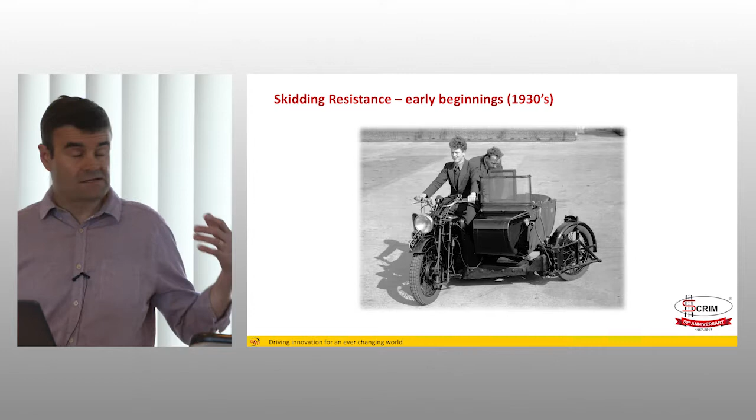Measurement of skid resistance is not new technology in this country. This was developed in the 1930s when a lot of research was done, by the predecessor to the TRRL, and this concept of a sideways force measurement system was developed.

Initially it was on a motorcycle, with a full compliant risk assessment for those people involved. The first SCRIM, as we would recognise it, was produced in 1967, so just over 50 years old.

SCRIM is an acronym that stands for Sideways Force Coefficient Routine Investigation Machine, surprisingly shortened to SCRIM, but it kind of says what it does. So we're measuring a sideways force, and that force is used to characterize the skidding resistance of a road surface.

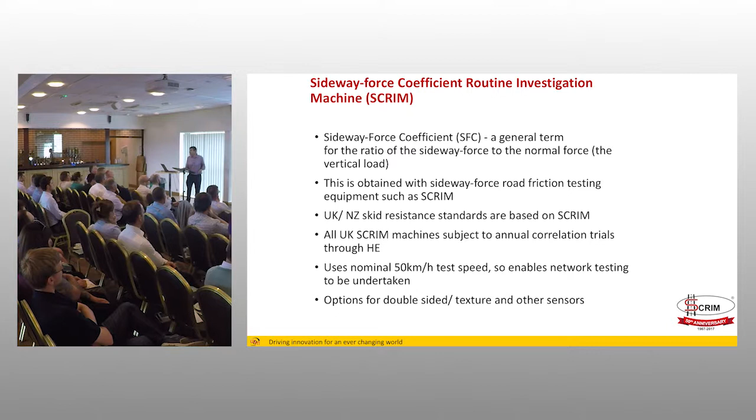All of the vehicles that use the sideways force technique in this country go through an annual accreditation process at TRL. So your supplier, which may well be WDM, should be able to provide you an accreditation certificate for the vehicle that's using it. The UK standard HD28 and the New Zealand standard, which goes by the snappy title of T10, are all based on SCRIM.

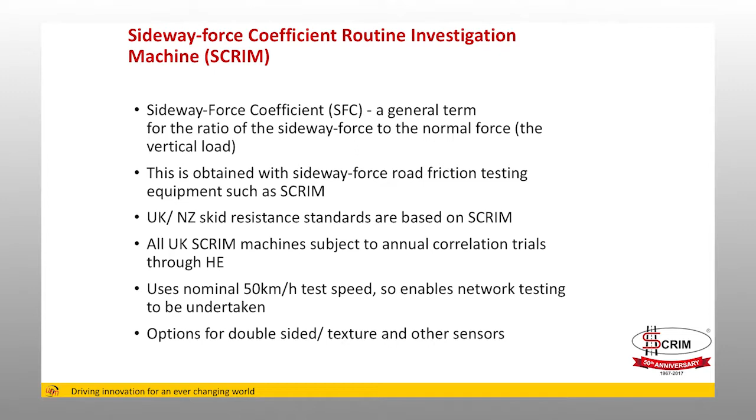Talked about correlation. The nominal test speed is 50 kilometers per hour, with a speed correction between 25 and 85. So it's a device that's designed for network testing, but can also be used for more detailed investigation. We would typically expect between 100 to 200 kilometers survey a day.

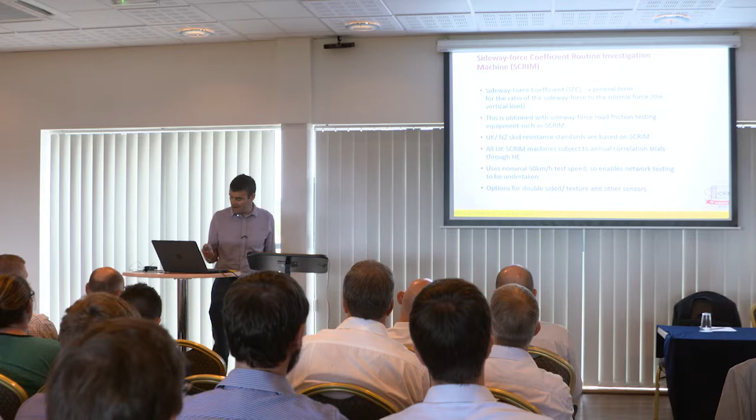There are lots of options about it. You can have a single-sided SCRIM, you can have a double-sided SCRIM, you can put texture sensors and other sensors on them. The only constraint typically is that SCRIM as a measurement process uses water, and mixing water with other sensors, particularly lasers, is not necessarily a happy mix.

So the measurement there is the test wheel. The test wheel has no tread. It's a standard resilience tyre held at a particular pressure, so it's the scientific principle of taking out the influence of other things that may be influencing your measurement.

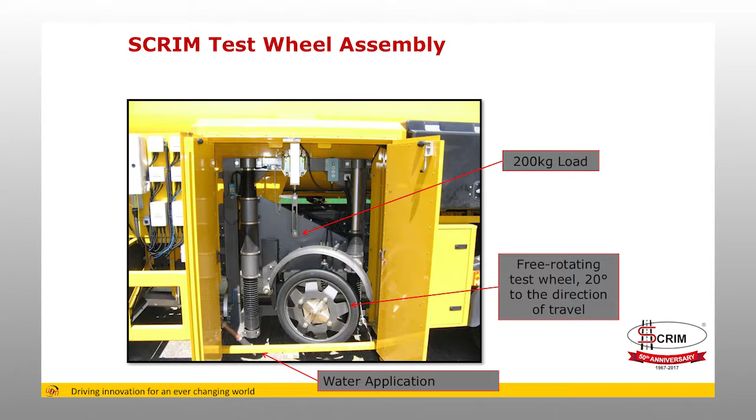It's set at 20 degrees to the direction of travel. So that's rotating, but effectively it's always trying to straighten itself, and it's that force of it trying to straighten itself, which is the force that the road is exerting on the tyre, that is what we measure.

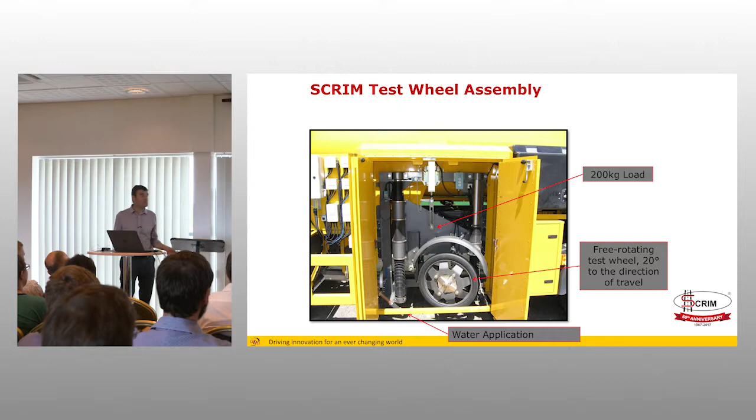Fixed load, 200 kilograms. The modern SCRIMs use a load cell, so it's a dynamic load measurement system where we're measuring the load. I think that's a 32 kilohertz system, so we're measuring that load and the sideways force continuously. Water is applied in front.

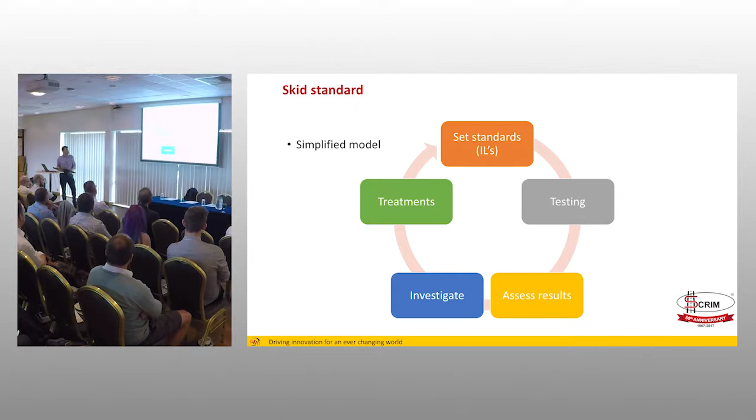We've probably already dealt with the sort of simplified skidding model. So you set standards, you carry out testing, you assess the results, you investigate the results against your standards, and then you decide to either treat or not treat. In theory, you go around in a cycle and maybe revise your standards if you find that you're investigating a lot of sites but don't feel there's a need to treat, or equally, the reverse is true.

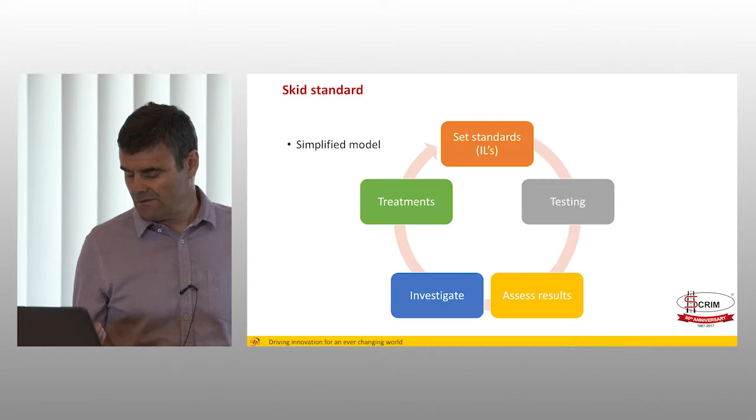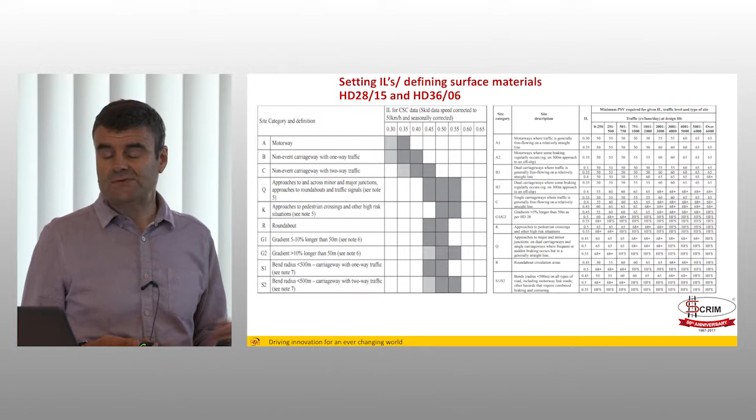In terms of treatments, most of you will be familiar with that. Two snapshots from HD28 and HD36. HD28 is the skid standard which sets the investigatory levels, and HD36 is a selection of materials guide, and that essentially puts a recommended PSV against a site category, an investigatory level, and a traffic level.

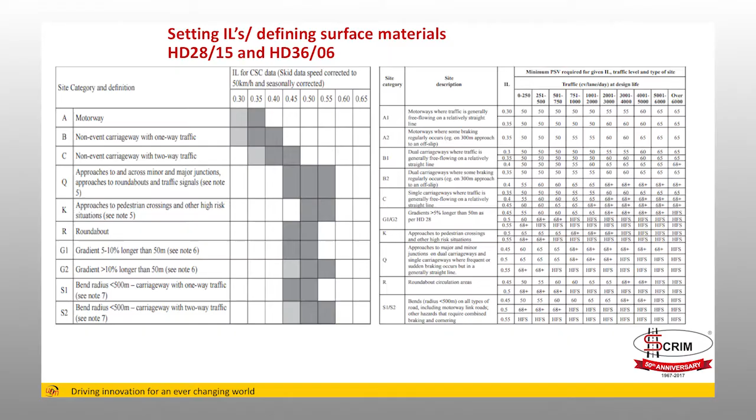There are local variations on that. Some authorities work to their own investigatory level tables or their own PSV table. But in essence, what HD36, when you drill down to it, says is once you get to an investigatory level of 0.5, you're typically getting into the area where you are looking at high friction surfacing as the material that will give you a high confidence of that skid resistance being delivered.

So typically that can be approaches to junctions, it's certainly approaches to crossings, and it can be tight radius bends.

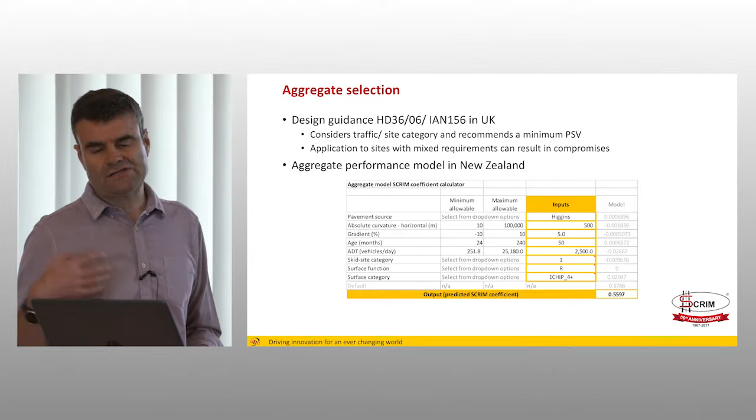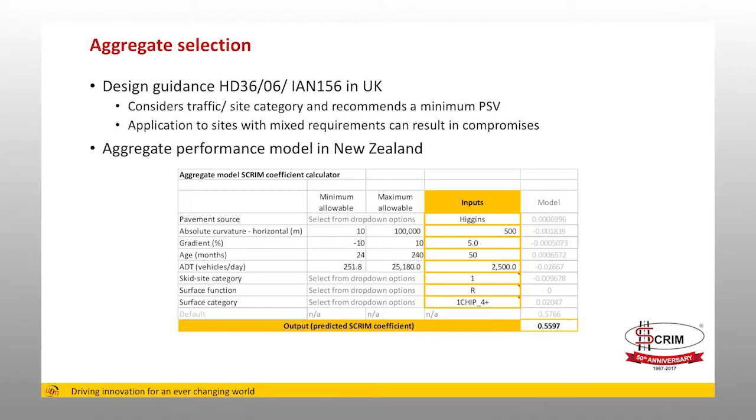In New Zealand, they apply a slightly different approach, which is an aggregate performance model. There's a statistical review of different aggregate sources. One thing HD36 doesn't explicitly say, and this does, is it asks for an estimated life - what life do you want that surface to last for? With an aggregate selection and characteristics of the site, it will give you a predicted SCRIM at that period of time.

Whether it's a more successful approach is a point of debate. They apply a very similar set of investigatory levels, but they also have an intervention level as well, and they tend to work very much to the intervention level for those purposes.

In terms of the highest investigatory levels, which are 0.5, 0.55, and even 0.6 in some circumstances, the recommendation in HD36 is 68 plus PSV as a minimum requirement. In many cases, HFS, high friction surfacing, is explicitly recommended.

HD36 is leading you to potentially using these materials, but in all cases you might have a process of departure or relaxation, which is that design process that actually evaluates individual sites and comes up with a suitable solution. If you have a departure and relaxation process, you need to have a record of that and how it's applied.

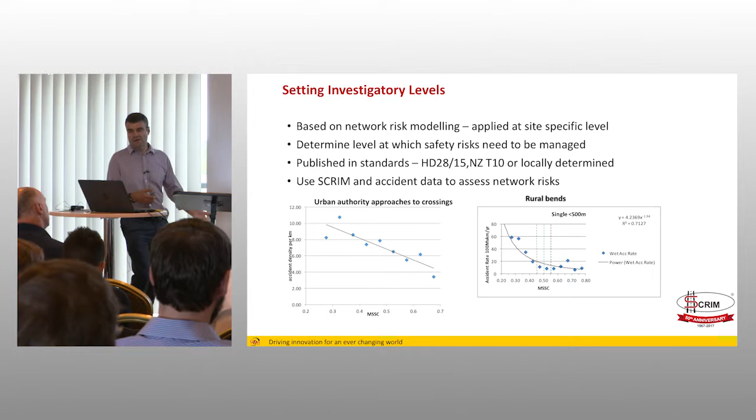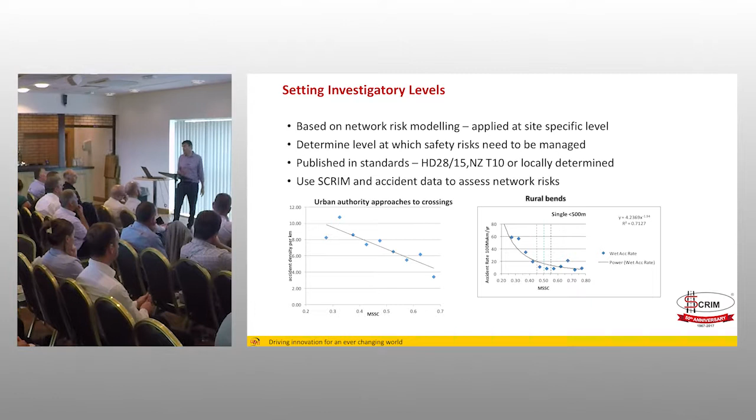The urban authority approach to crossings is a fairly linear relationship, and the rural bends is a slightly more power relationship. So the premise of setting investigatory levels is a balance between affordability and what I'll call an acceptable accident rate, rather than a desirable one. We've done this research for a number of authorities, and we almost without fail come to very similar shapes of graphs.

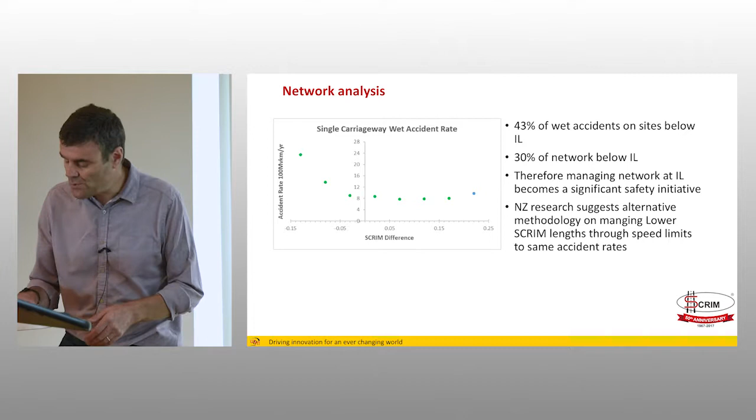So this is a network analysis. This is the SCRIM difference - the measured skid resistance minus the investigatory level. So anything that's positive means the measured SCRIM resistance is above investigatory level. Anything that's negative means the skid resistance is below investigatory level.

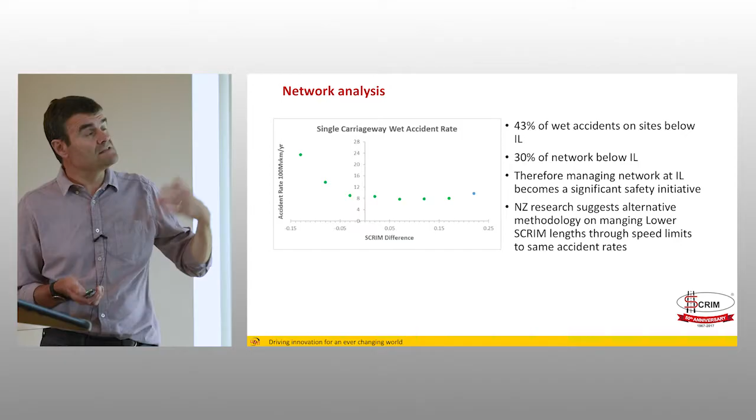This is single carriageway sites. 43% of the wet accidents are on sites below investigatory level, and 30% of the network is actually below that. The graph tells you that once you get much below 0.05 below investigatory level, the accident rate is starting to increase. So managing the network at and around investigatory level is a significant safety initiative.

You'll have colleagues in road safety who will look at accidents and investigate causations, trying to understand the circumstances. Yet in the background there may be a level of risk to your network just because parts of it are below investigatory level. Balancing those two approaches is something that I think a number of highway authorities do struggle with.

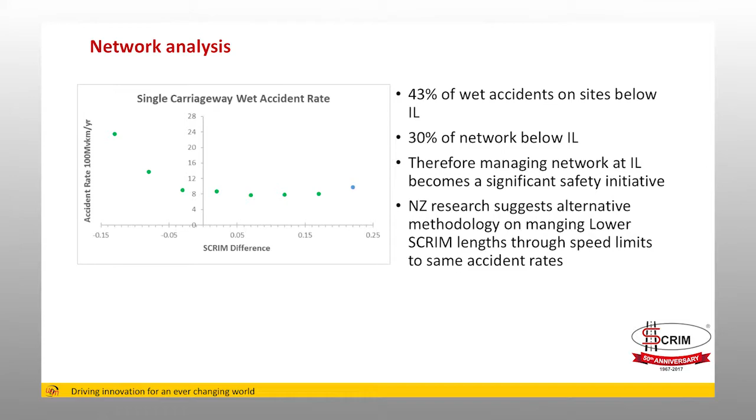New Zealand do a lot of research - everything they do is evidence-based, and they're also very good at sharing their research, which helps in increasing understanding. They've done a recent piece of research about managing accident rates on skid-resistant deficient sites by changing speed limits, doing cost-benefit analysis taking in travel time, user costs, etc. Their research is largely suggesting that a 10 kilometre per hour reduction in speed is the equivalent of something like a...

...0.05 change in skid resistance, predicated on the fact that you need to have a realistic enforcement policy for speeding and an acceptance that people will actually adhere to the limits. It still leaves this residual question about the 85th percentile - what about the 15% of people who will still speed? But it's a piece of work that they're developing at the moment.

This is actually from Transport Scotland. So we've looked at accident rates and the severity split by site category. And what it essentially shows is bends on single carriageways, approaches to crossings and single non-events tend to have a higher proportion of fatal and serious accidents.

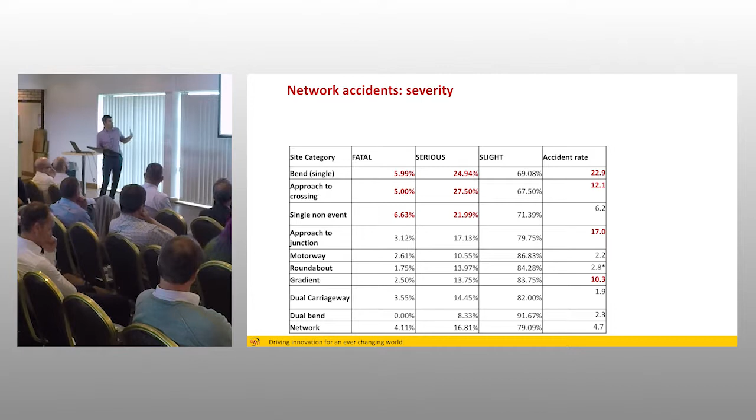The bend is probably self-explanatory in terms of losing control, leaving the carriageway. The approach to crossing is probably because there's a high probability you're going to hit a vulnerable user. And the single non-event might be a mix of factors in there. But essentially, it's showing that the accident rates and the severities are linked to that.

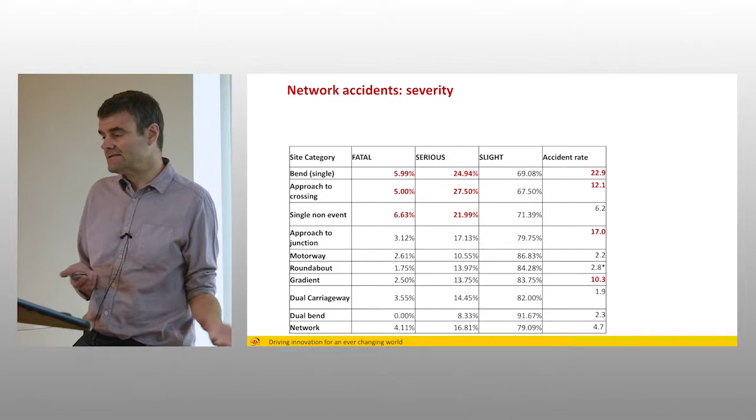And of course, where are we asking for the highest investigatory levels typically? It's on single carriageway bends and approaches to crossings. And the accident rates are also higher for the first two of those sites and approaches to junctions.

So, a snapshot of an aggregate performance review. Again, this is Transport Scotland. To do this, you need good construction records. If you've not got good construction records, you can't do this. And good construction records means you know the location, the time it was laid, the material, the aggregate source, and so on and so forth.

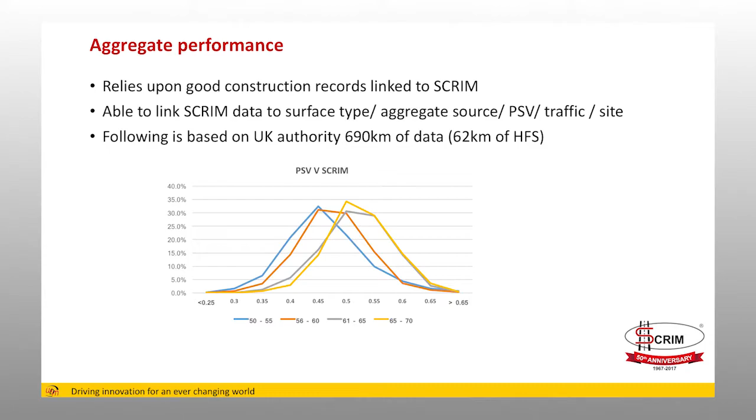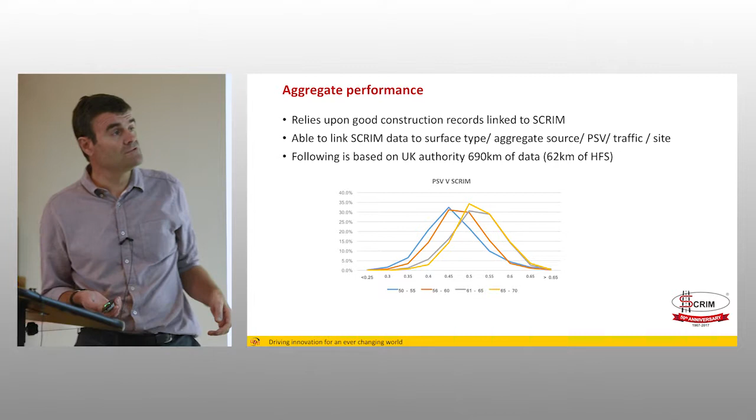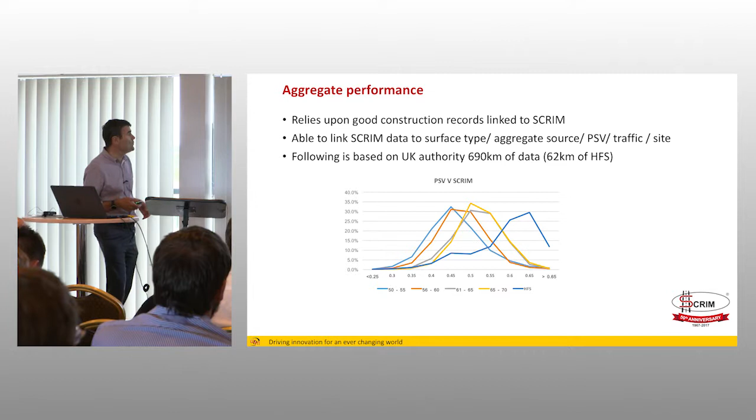But this is PSVs against distribution of PSVs against SCRIM. And fortunately, as you go up the PSV, there is a slow march to higher skid resistance, which is what you want to show. If we then put the high friction surfacing on top of that, you can see there's a significant step sideways by almost 0.1 skid resistance level. So 0.1 becomes a very significant increase that you can achieve from that.

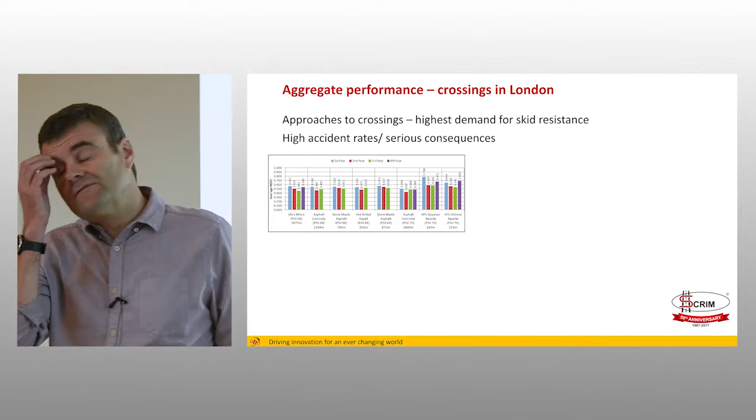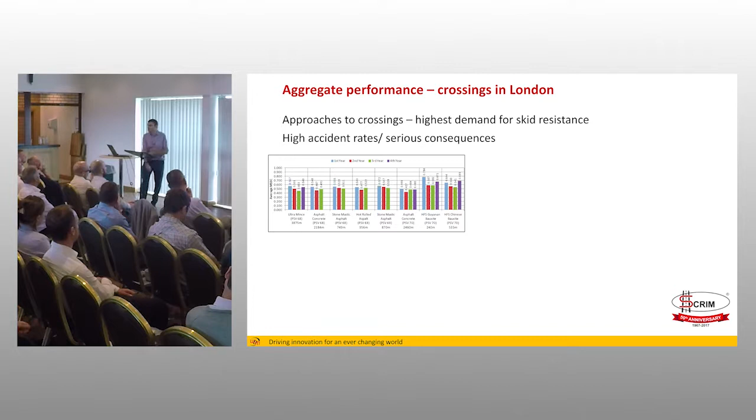We were, a few years ago, commissioned by the 33 London boroughs and Transport for London, which is an interesting environment to work in with 34 highway authorities in London. And they were very concerned about what they saw as the financial consequence of their approach to crossings and having a demand for skid resistance on them.

When we've reviewed sites and prioritised sites for London, about 60% of the sites that are high priority tend to be on approaches to crossings. And they said, we've got some information about other material types that have been laid, and we'd like you to tell us, look at the skid resistance to see what the data shows.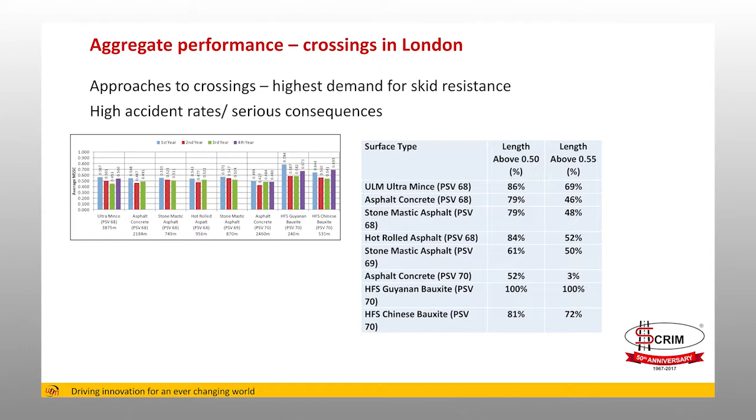And I appreciate that's fairly difficult to see, but you've got a ULM with a 68 PSV, a 68 PSV asphalt concrete, a stone mastic asphalt. And essentially, we looked at the skid resistance over years, but that chart is summarised in there.

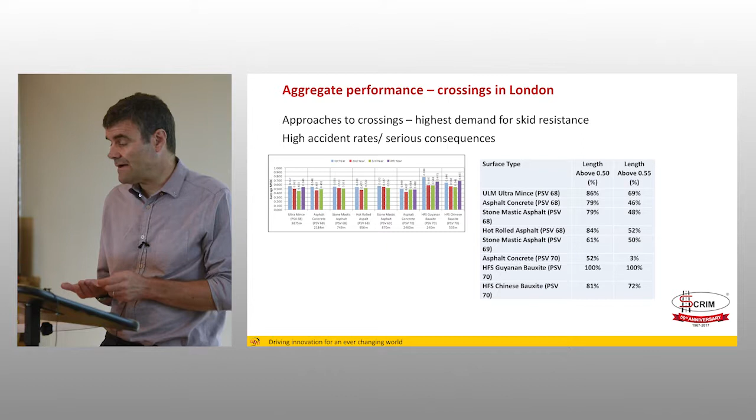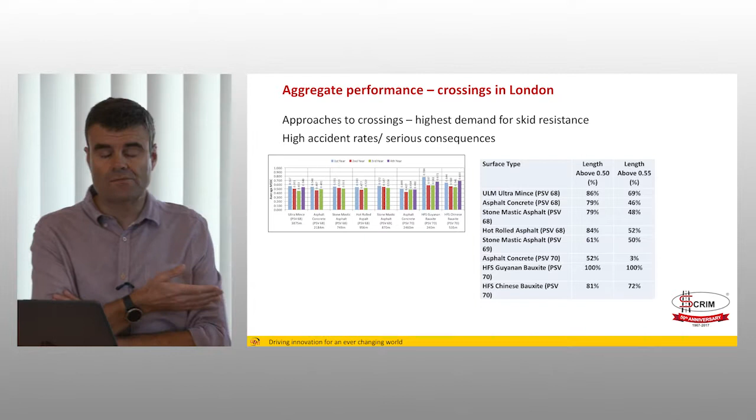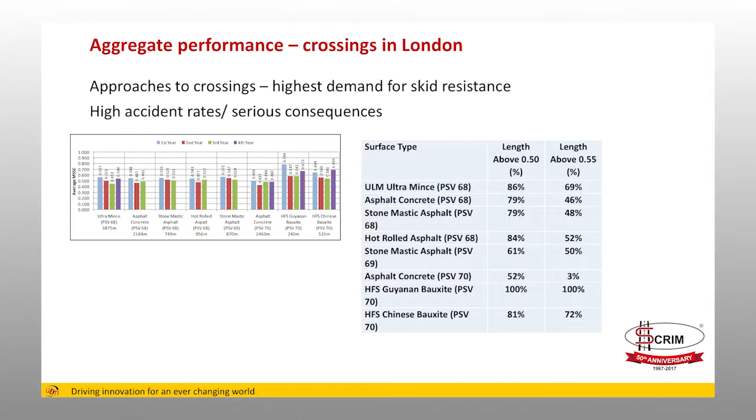Essentially, the high PSV aggregates, naturally occurring aggregates, would give you about an 80% probability of being above 0.5 IL. In London, they do use 0.55 because of the vulnerability of pedestrians and the number of pedestrians on crossings in the city. So for the 0.55, essentially what that data was showing is the only material that's going to give you a high confidence of meeting 0.55 in particular was the high friction surfacing.

That wasn't necessarily the result that the London boroughs wanted, so we did some additional work to look at evidence. Analysis we did many years ago showed a good correlation between accident rates and skid resistance of crossings. And going back over 30 years ago now, Arthur Young published his PhD, which basically showed benefits could be achieved through the application of high friction surfacing.

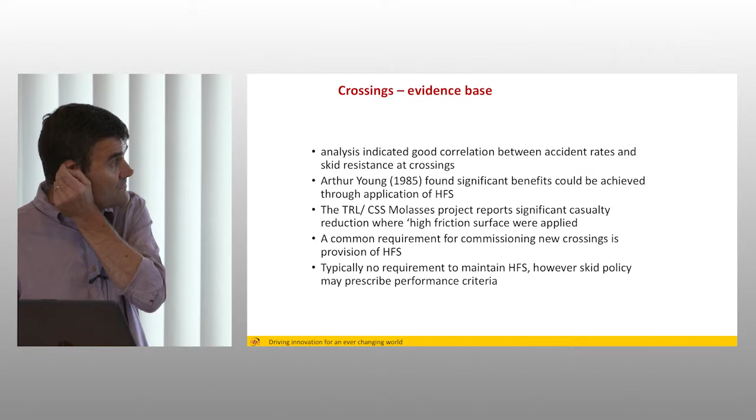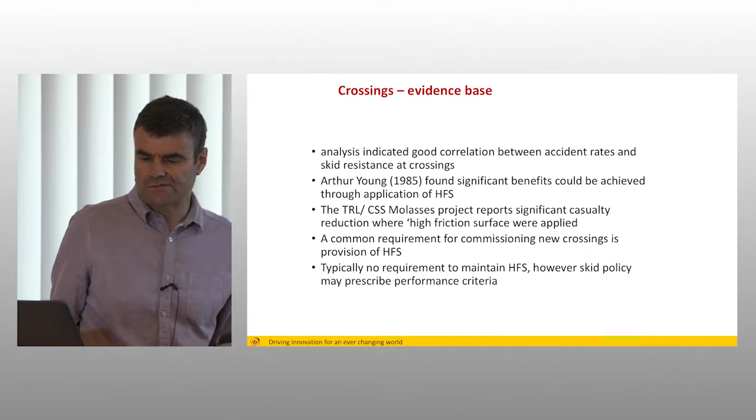The TRL County Surveyors Society, as was, in the Molasses Project, which was local safety scheme assessment, showed high friction surfacing was very successful. In London, a requirement for commissioning all new crossings is the provision of high friction surfacing, but there's no commitment to maintain that high friction surfacing. And the way that budgets are allocated in London leads some boroughs to choose not to do that effectively.

So a new crossing in London will have high friction surfacing provided. Once that surface has expired its usable life, it's very much at the discretion of the borough maintenance engineers as to whether to replace it or not. And there's a drive for them to replace it with shorter length alternative materials. But the evidence that we've collected suggests that if you're targeting the highest investigatory levels, you do need to seriously look at high friction surfacing as your material of choice.

The anecdotal evidence, and you've probably touched on this already, is performance is poor, it's high cost, and they don't have a ring-fenced budget.

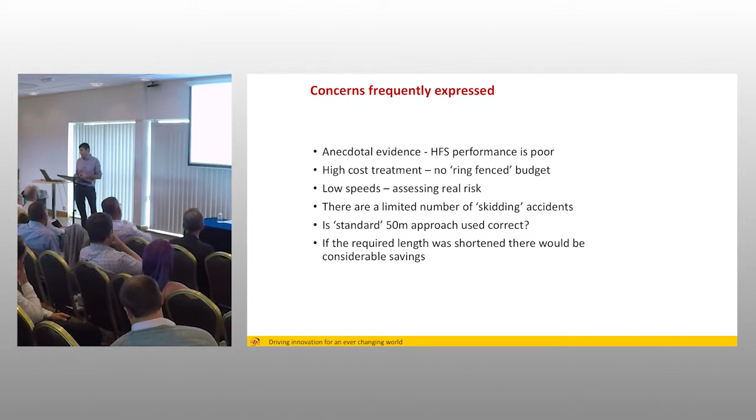In London they say we're low speed, so what is the real risk? One interesting discussion we had with one borough was about King's Road. They said King's Road is essentially just junctions and crossings for the entire length, with crossings probably every 150 metres.

They said this environment's so controlled that high friction surfacing isn't required. But the accident people said they have a real nighttime accident problem on King's Road because of pubs and clubs along the length, with people in various states of mental competency crossing the road. So the maintenance guys see a very controlled daytime environment, but at night there's a serious accident issue.

Then there's this ongoing discussion about whether these are real skidding accidents. When we work with local authorities, we try to get them to look at the contributory factors to say: is it loss of control? Is it leaving the carriageway? Is it a fail to stop? Because that's all indicative of the surface condition and surface friction.

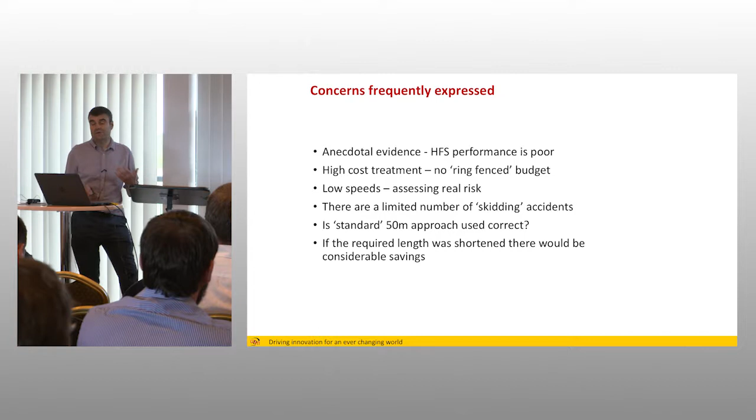Then there's a debate about whether you should put 50 metres down. Their view is if they went from 50 metres to 40 or even 30, they would save significant money across London as a whole.

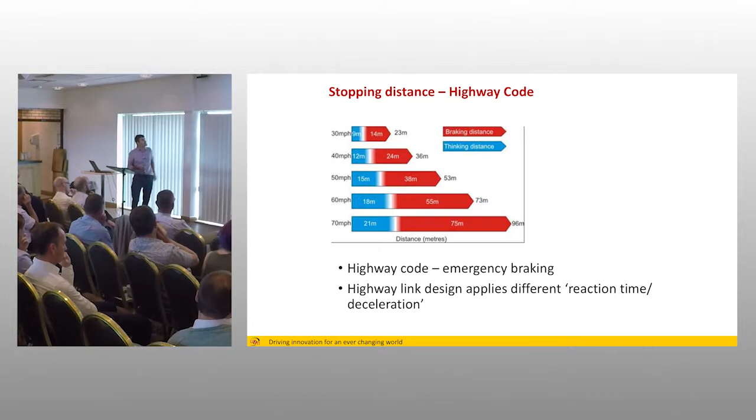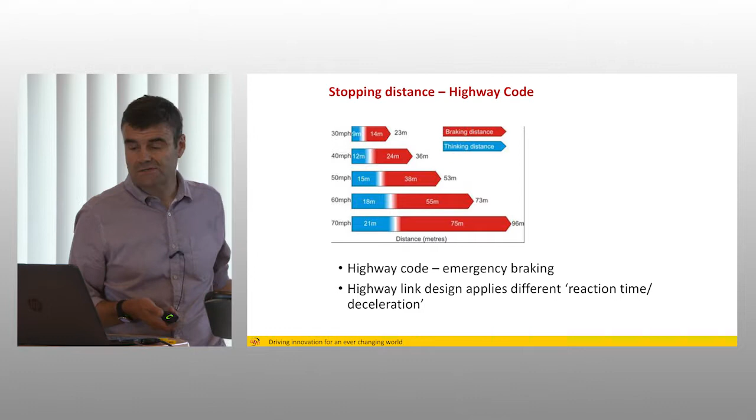The highway code stopping distances have your thinking distance and braking distance. The highway code says you could reduce the distance because the stopping distance is 23 metres, but that makes assumptions about reaction time and deceleration that are probably fairly uncomfortable. Highway link design applies a completely different reaction time and deceleration, and the manual for streets comes up with another set of stopping distances - if interpreted, 40 metres might be appropriate.

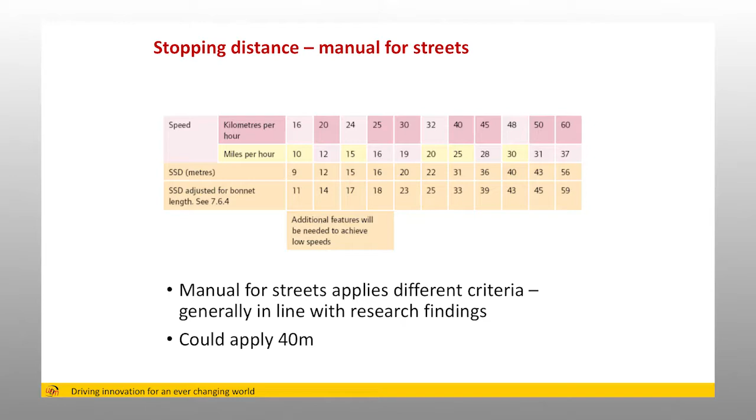Then there's a debate about whether there's real benefit to just reducing it by 10 metres. We looked at 129 crossings which had crashes, accidents, collisions - whichever term you choose - and reviewed the locations from police reports relative to the crossing location. Not unexpectedly, the highest number of accidents was closer to the crossings, reducing as you went further away. But we found a strange blip between 35 and 40 metres where accidents went up, and we didn't really have an obvious reason for that.

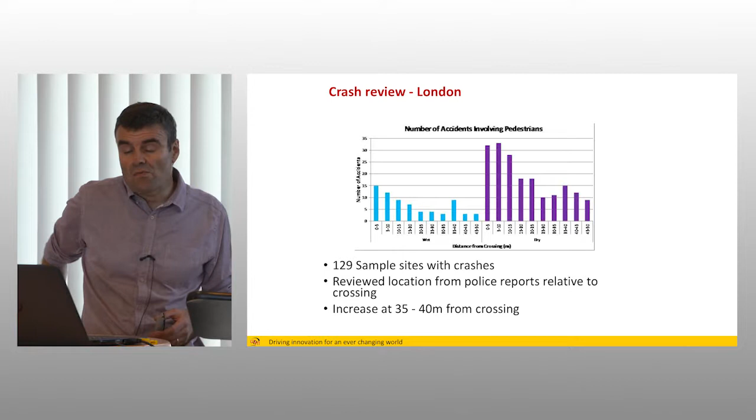One observation was people don't always cross at the crossing - they might cross in the vicinity because they perceive it to be safer. The concern was you need to put something down that provides a safe environment, and for the sake of 10 metres of material, when you've already got traffic management costs and contractor mobilisation costs, there's an argument about whether the cost-benefit ratio really stacks up. But our conclusion was there may be a case to reduce the length of approach to crossings to 40 metres, and therefore the high PSV requirement.

Speed can vary greatly. We picked up some data for the length of road from Chiswick Roundabout through to Hyde Park Corner, and the speed range in one day varied on average from 10 miles an hour to over 30.

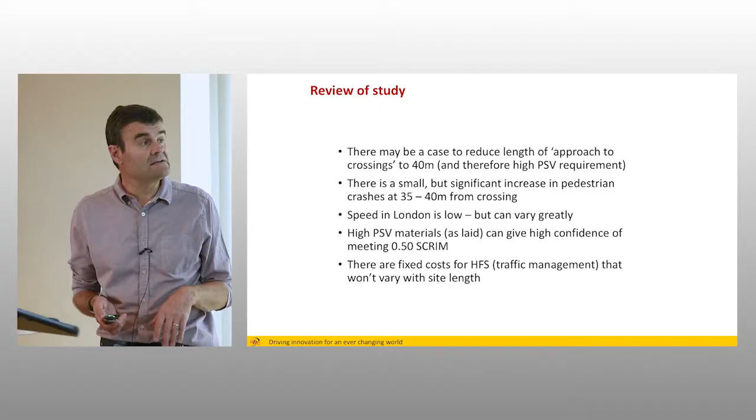High PSV aggregate material, when laid, can give high confidence of meeting 0.50 SCRIM, but won't give you that equivalent confidence of 0.55 or above. And as I said, there are fixed costs with HFS that won't vary based on site length, so there's an economic discussion about what genuinely you'll save.

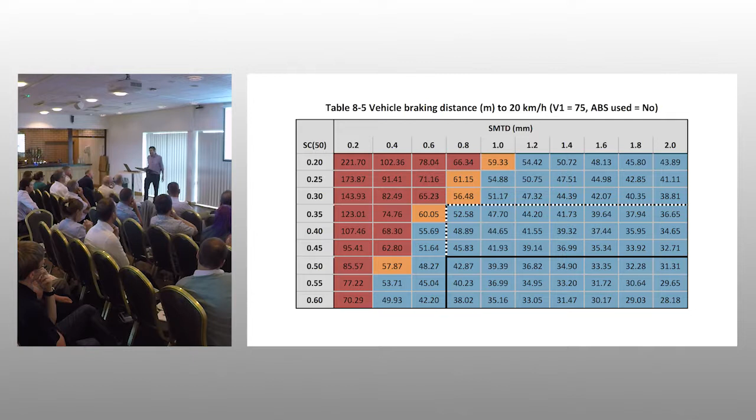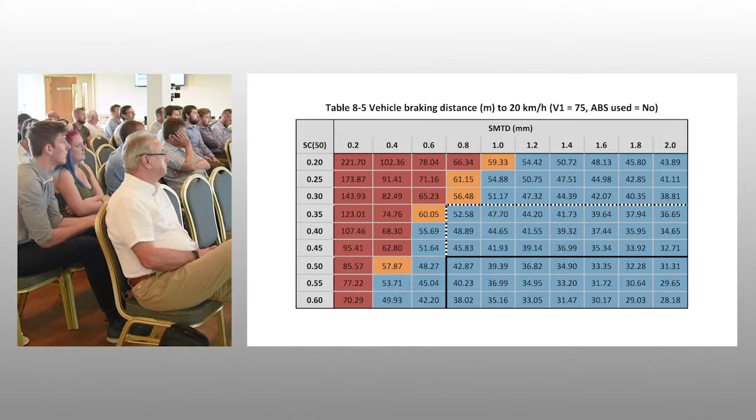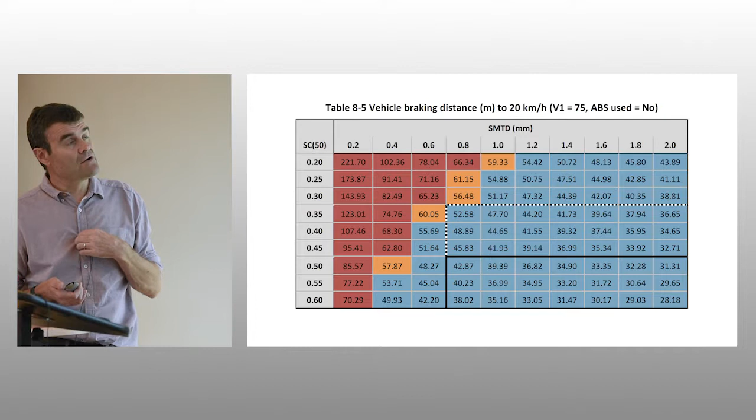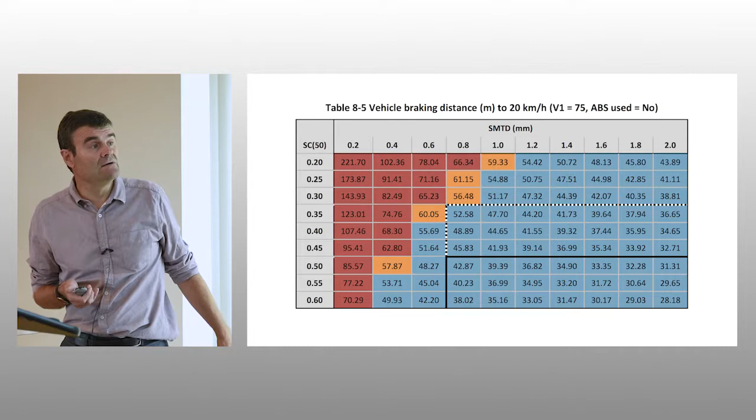At the previous event in Leicester, there was a debate about braking distance and what the evidence showed. There's a TRL report called PPR 815 with an assessment of braking distances using a braking model - a mathematical model to correlate braking distance with surface characteristics. You've got skid resistance down the vertical, SMTD, and this is the distance to brake for 20 kilometres per hour - not to zero - with an initial speed of 75 kilometres per hour without ABS. Anything flagged red is greater than the highway code distances, amber is about equal, and blue is less than 90% of those distances.

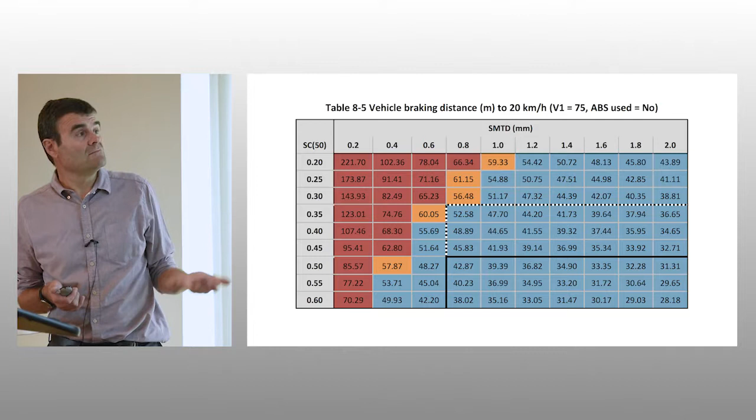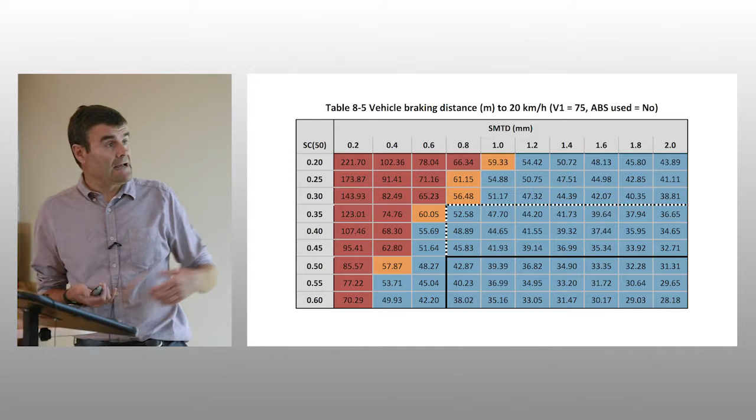So the question was what benefit might we get if we went from a 0.45 to a 0.55 skid resistance, at a 0.6 texture - that data says the stopping distance will reduce by 6 metres.

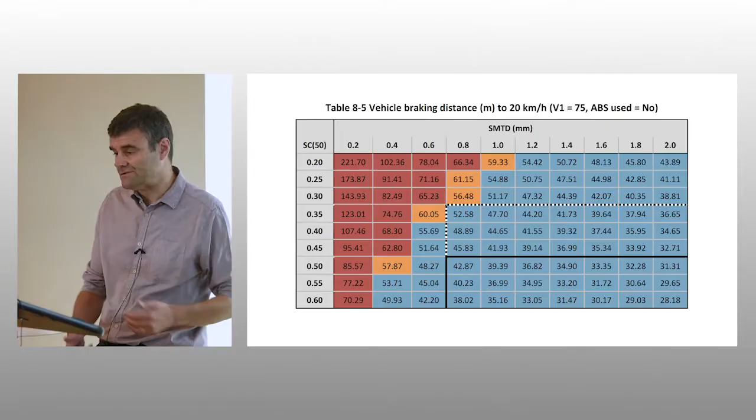6 metres could have a significant consequence on the outcome of a collision. It's freely downloadable, a very good comprehensive overview of skid resistance, but there's a lot of maths in it, so I'll leave you with that to make your own decision.

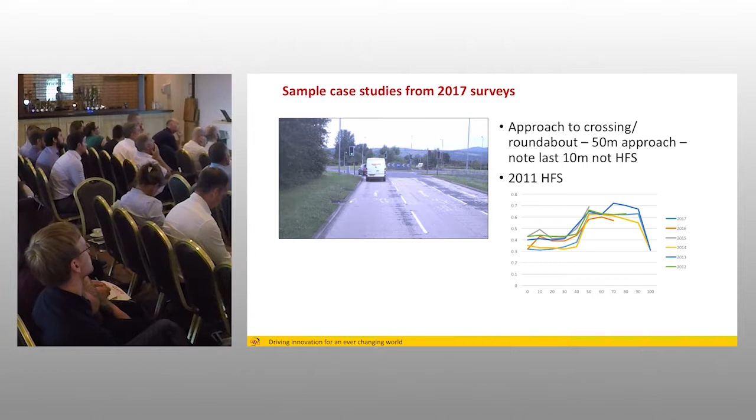But I took a virtual drive down the A82 in Scotland and looked at bits of high friction surfacing and looked at the skid resistance data.

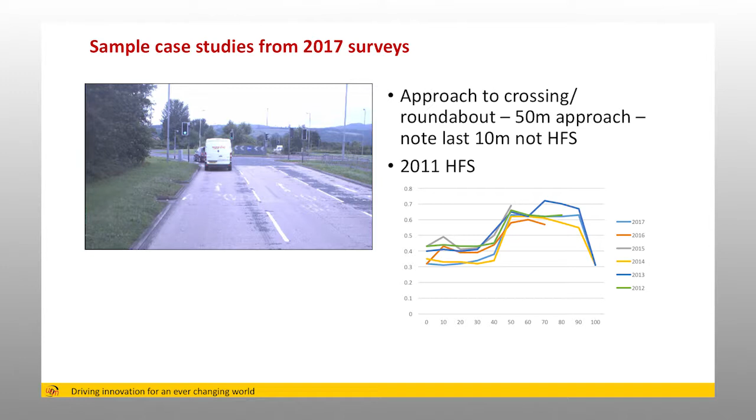So, approach to a crossing, visually not perfect, but a fairly intact high friction surfacing. You can see the skid resistance over the years, and also where it picks up quite significantly at the start of that high friction surfacing. On the basis of the data that we hold, I'd say that one's still performing reasonably well.

It was laid apparently in 2011. As you can see, the last 10 metres it drops down significantly, which is where the end of the HFS is at the crossing. A bend, 2012, high friction surfacing, visually not as good, and there is a suggestion that the 2017 SCRIM data shows a significant drop-off.

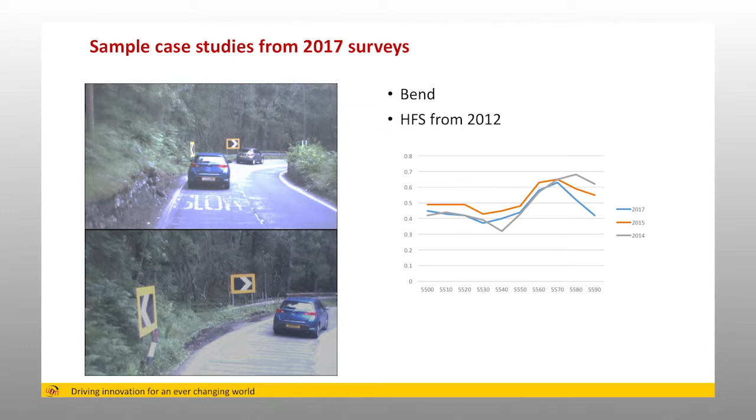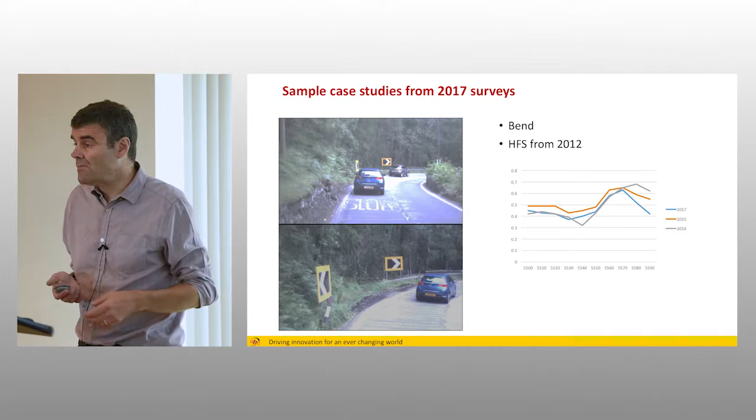In looking at these images, you have to remember in the UK we're measuring skid resistance in the left-hand wheel path only. So on the bottom image, the deterioration is probably more marked on the right-hand wheel path. There's always that test of how consistent the surface is, whether it's showing different patterns of wear.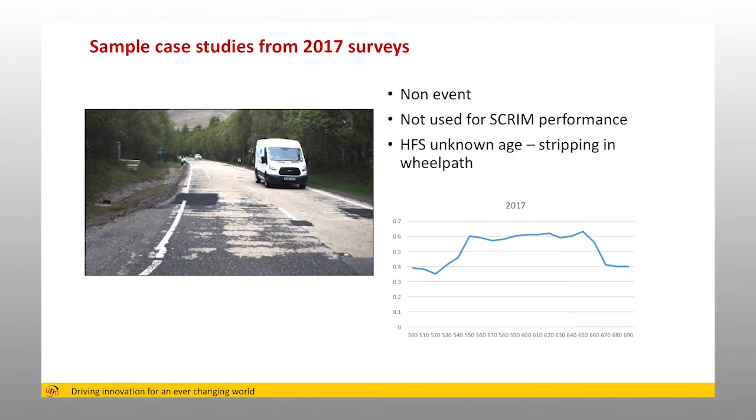Another one, looking particularly at the start, not particularly great. We don't know the age of it, but again it doesn't look fantastic. There's not a particularly attractive patch in there, but again, it's consistently providing 0.6 skid resistance.

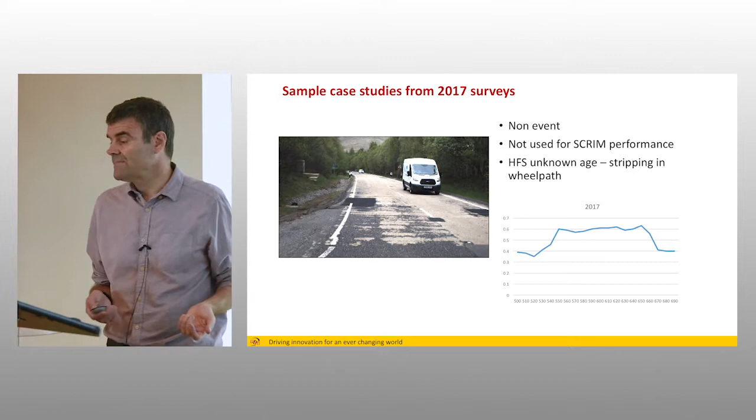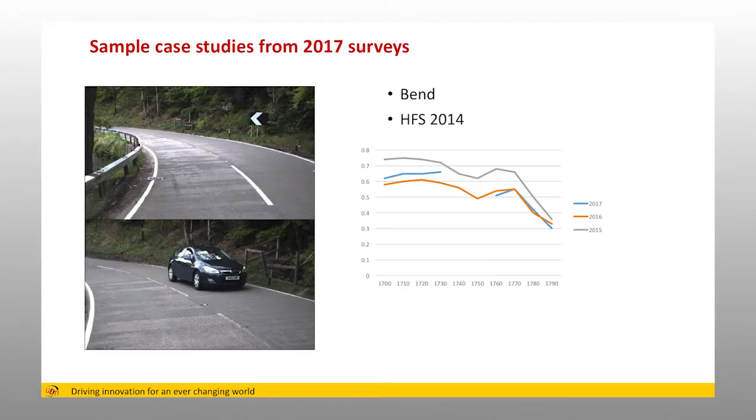And another bend where there's probably less high friction surfacing and more underlying surface there. Again, you can see there's quite a significant drop from the 2015 to 2016 data. But I'm going to leave you in not-so-sunny New Zealand at the moment, depths of winter.

This is a site that, depending on your pronunciation, is either Petwon or Petone Overbridge. This is a site that, for the NZTA, I think they call it their recalcitrant child - they really had issues with it.

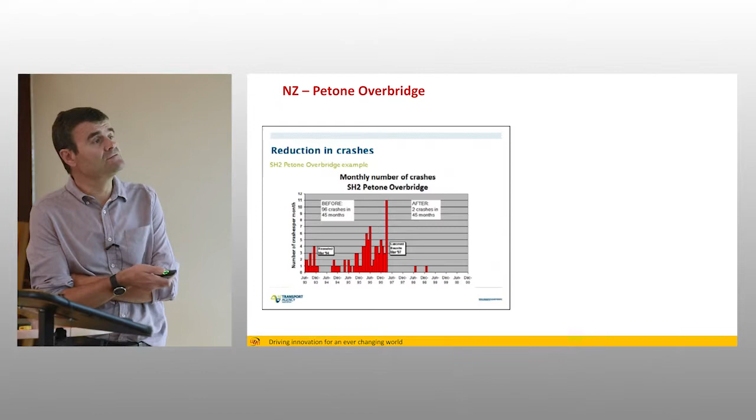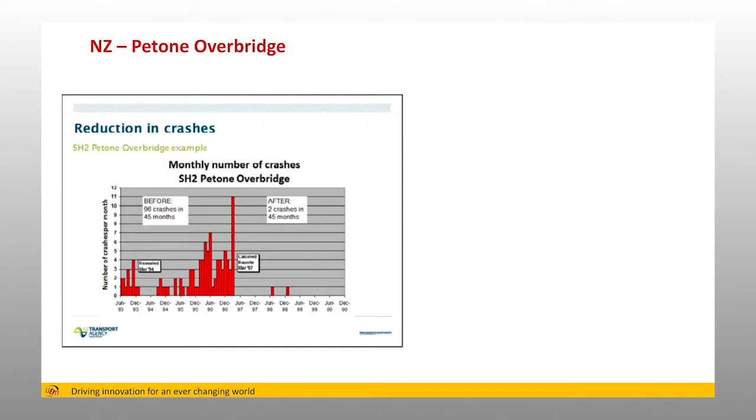That is the accident rate per month for a period of time. They were consistently getting accidents of upwards of 4 or 5 per month in that particular location. They resealed in March '94, accidents went down, and then slowly the accidents reoccurred.

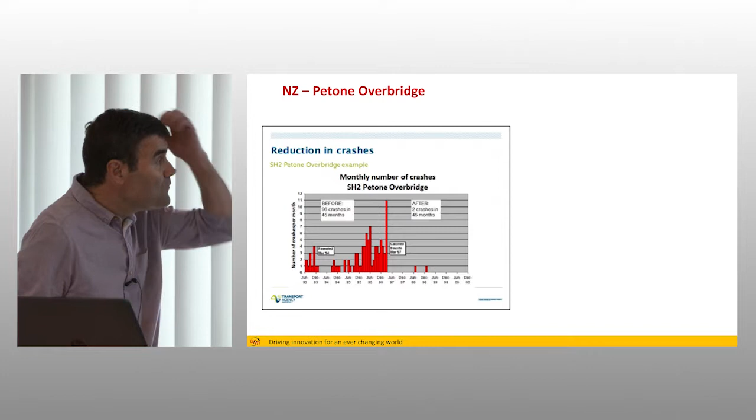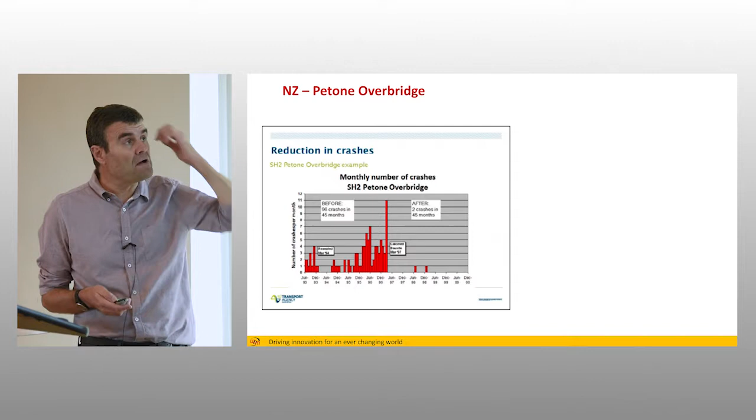So they did their first calcined bauxite treatment in New Zealand in '97, and in the 45 months afterwards they had 2 crashes compared to the 45 months before where they had 96 crashes. As an indication of impact, it's one of the best studies that I've seen of that kind.

And it's what they say in their context: you're coming along a dual carriageway and then you've got a tight radius bend that just tightens and tightens and tightens. People were basically leaving the carriageway there until the high friction surfacing was laid.

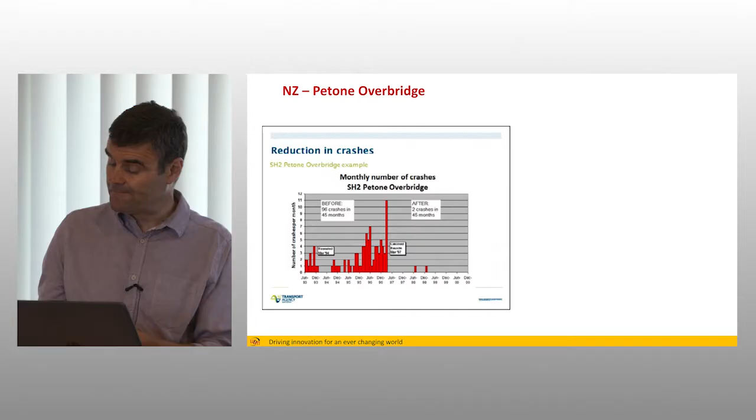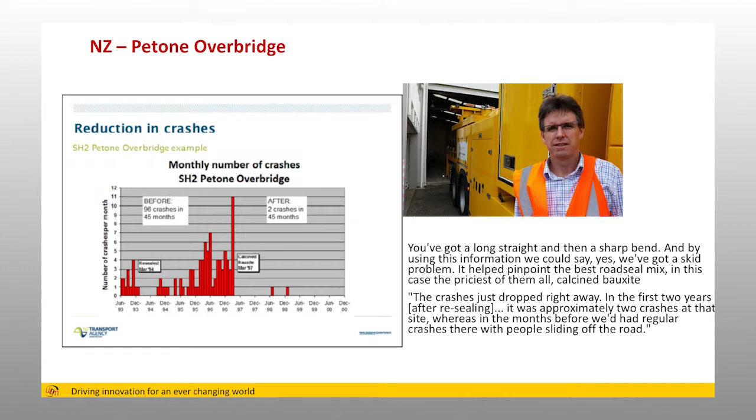This is one of our NZ clients, Mark Owen, top guy, and this was his comment about it: essentially, they used the priciest mix of them all, calcined bauxite, and crashes just dropped away. So, yeah, it's a good case study of whether high friction surfacing works.

So my conclusions are pretty much that the studies we've carried out, from numerous highway authorities, clearly demonstrate that collision rates increase as skid resistance falls. And the process of setting investigatory levels is informed by that data.

There was this concept that you would equalise risk, but in reality you can't equalise risk to the higher event sites. The network SCRIM testing provides data to act upon in skid strategy, and part of that process should inform aggregate selection.

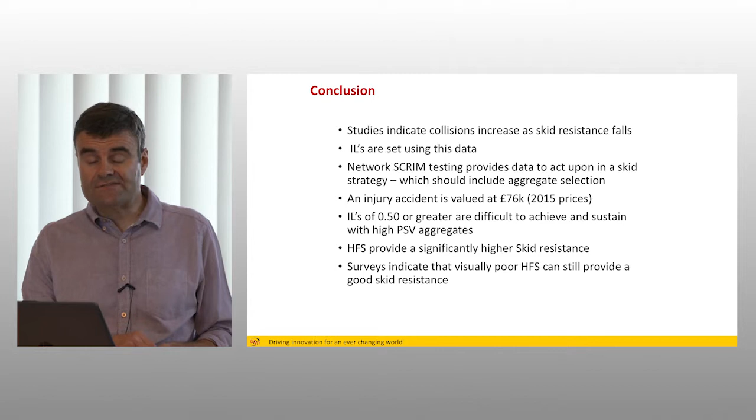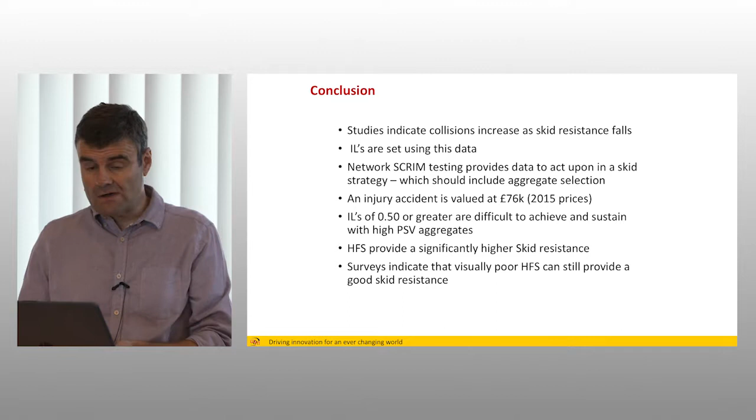Just a reminder, an injury accident is valued at £76,000 in 2015 prices. So saving one accident pays for itself times over again with a high friction surfacing application.

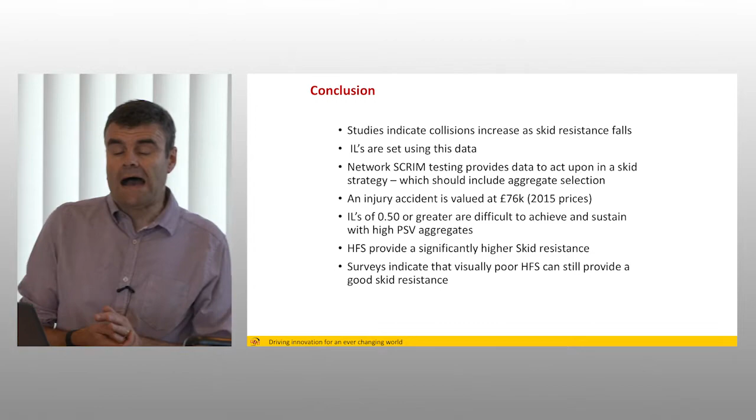Investigatory levels of 0.50 or greater are very difficult to achieve and sustain with high PSV aggregates, and the HFS provides a significantly higher skid resistance than conventional materials. Surveys do indicate that visually poor high friction surfacing can still provide a good level of skid resistance, so whilst it might have stripped in places, that doesn't mean it's not doing the job it was actually laid to achieve.

So that really concludes what I was going to say. Thank you.